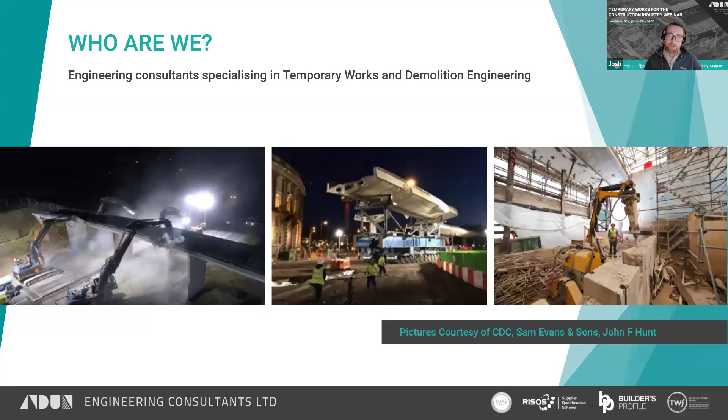So today's topic is temporary works design briefs.

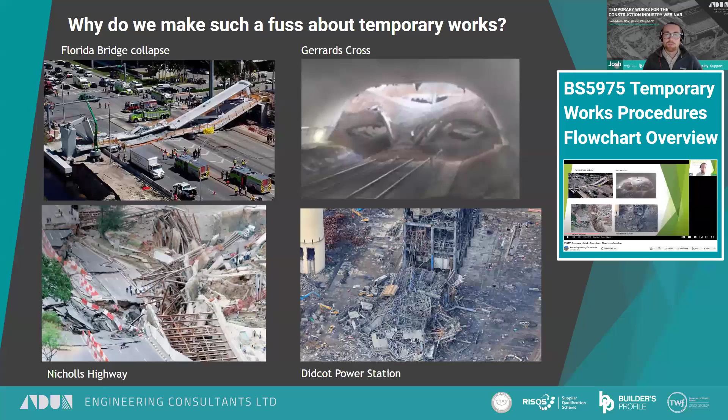We have got a webinar that covers the temporary works flowchart, and that flowchart review, including some of those case studies there, and that covers the procedural control of temporary works more generally, as opposed to today's session, which is going to be a more focused review of the design briefs. So make sure you check that one out, which is on our YouTube channel.

So we've got these disasters. Yes, temporary works can be fraught with risk if it isn't planned properly. But how long has this been happening for? Well, it's quite a while. Really, it just goes hand in hand with construction. The required control is becoming more and more important now, though, as we start to build things which are much more complex in more complex environments.

This case is the earliest temporary works failure that was referenced as such, and in fact it was discussed in Parliament as well.

Fast forward a little bit, it's 1972, I think, Loddon Viaduct, it's a bridge just outside Reading. It's the construction of one highway in each direction, and during the construction of one of the bridges, the falsework failed, leading to large-scale collapse.

Only 3 were killed in this incident, which is quite impressive - or impressive's not really the right word, but it's astounding, I think, probably more appropriate, because there were operatives on top of the structure as it failed. And that's more by luck that we had as few fatalities as you'd expect, because it happened on a lunch break and they were staggering the breaks as well, so there was a reduced number of people on site.

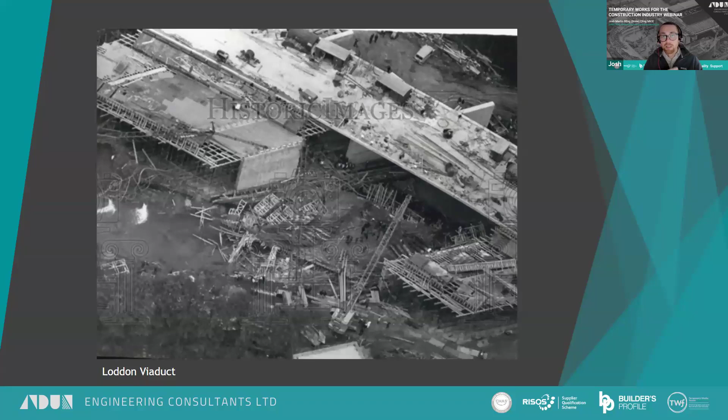There were also references to some of the guys on the span feeling a slump in the deck as the thing was about to go - they were able to jump across to the other side of the bridge that had just been constructed as well, which is also gobsmacking. Yeah, large-scale collapse, 3 fatalities.

And so what we found is that during the 50s, 60s, and 70s, the post-Second World War infrastructure boom, there was some large-scale infrastructure being built and large-scale collapses that were the results of poorly planned temporary works. And that was a fact.

These failures led to the industry leaders sitting up and thinking, we need to do something about this because it's certainly something we can avoid for the future going forward. It led to Sir Stephen Bragg and the Bragg report, a committee that put together an investigation and report to review the failings the construction industry had, and identify recommendations on how we can improve.

Most of these recommendations, which came out in 1975, were incorporated into the British Standard of Temporary Works, BS 5975, as we have it today. Some of the key ones I've listed here.

We've got a number of them associated with lateral stability, making sure that if we're supporting something, it is suitable for some form of lateral load. It doesn't just all fall down like a pack of cards when we accidentally hit it with an excavator bucket, for example. So we've got horizontal loads looking at lateral stability, lacing and bracing of props to provide that lateral stability overall on the propping system.

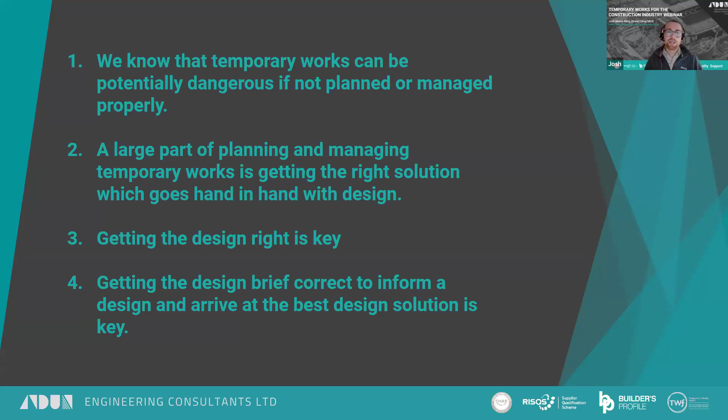The design brief sits in that procedural control before the design is started, and is usually written by the temporary works coordinator once a construction strategy has been agreed, because it's only at that point when you'll know how you're going to build something, and therefore what kind of temporary work solutions will be required.

We've got an online temporary works flowchart, which takes you through the whole process of temporary works from the project's inception through to completion, and Christian has put that link in the chat. It will take you to a login details page, and it's totally free. You put in your email address, make a little account, and then you can click and choose the most appropriate option, whether you're a principal contractor, a managing contractor, or a subby, and then it'll take you to an interactive flowchart which references BS 5975 directly.

We've also put little interactive buttons which tether the particular clauses to the relevant stages of the process. So you can see here that the design briefs can be written once the temporary works register has been filled in, or at least started. And then the design briefs can come before the design team are selected as well, so they can all be sat there ready before your design team is selected, and issued to prospective engineers for quotes, then back and ready in draft form until all the information is available to enable the design to start.

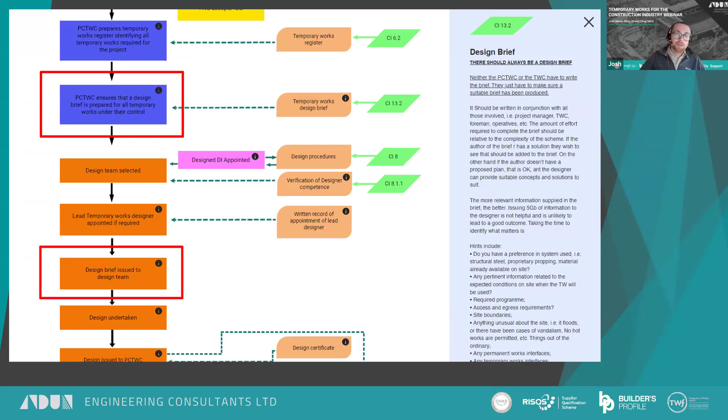So the design brief should give the designer all the relevant information to complete the design. It may be the obvious stuff, what needs to be designed, the category of check required, etc. I've put in a couple of extracts from BS 5975 here. It needs to provide the intent and the information for the design to be carried out, first and foremost. It doesn't necessarily need to be a formal document for every single task, but it should have the information to allow the design to be completed and checked.

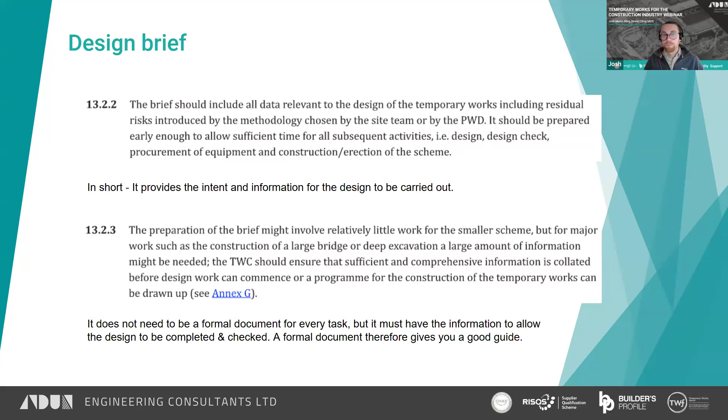It is good, in my opinion, to have a written trail of what was asked for when, and it can be used as a bit of a tool to bash your design engineer on the head if you've asked for something formally and then you get the design through for review and think, oh, they haven't included this or this part of the design. It's very difficult to go back when it's just verbal. If you've got a written design brief, then it's very simple to go back with that written proof. Some food for thought there.

So a few sections that I'm going to cover next will be the kind of appropriate things to include in a design brief, and I'm going to use our ADUN design brief template, which is downloadable from our website. Chris has put the link to that in the chat, but if you go to our website, adun.co.uk, click on resources, it's under the resources there.

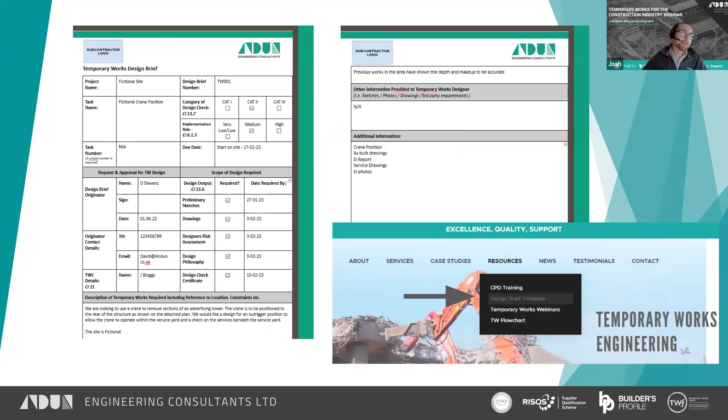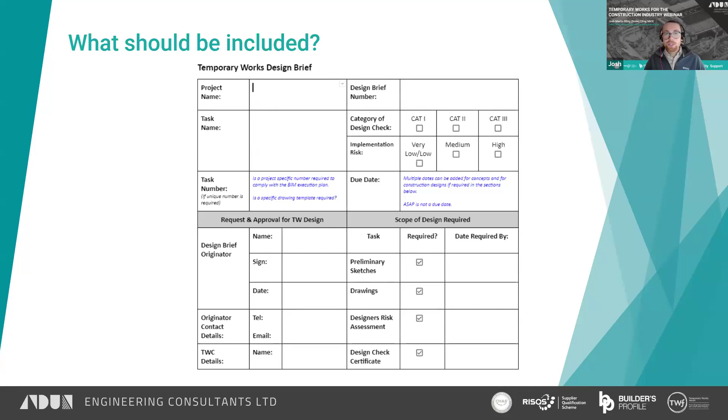Essentially a scale of how independent you'd like the person checking a design to be. If it's a low risk design, then it's not necessary to have a drawn out checking process, so a basic check from someone within the design team is more than acceptable. However, if it's high risk, a bespoke scheme with innovative design including departures from industry accepted standards, then it will more than likely require a Cat 3 check, which is another organization carrying out their own independent check without looking at the calculations that the designer put together to inform the design.

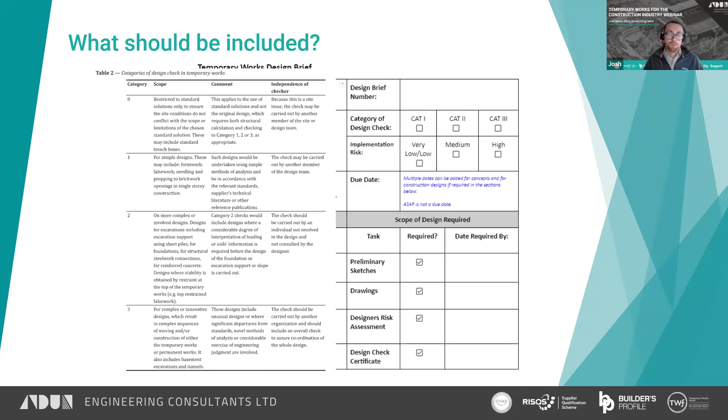Implementation risk as well relates to the execution risk, i.e. how it's installed and removed, the competency of the contractor building it, and the workmanship, etc. So it's the execution risk of the temporary works as well as the consequence of failure. And the consequence of failure is what happens if it goes wrong. If you stand back and think, well, if this thing was to fail, then what would happen?

Would it be a domino effect into a large scale collapse, or is it just something that's going to fall over in the middle of a green field? Well, the Heras fence has fallen over. We'll just pick it back up again and move on with our lives.

This implementation risk class should be put into the design brief, and it's classed by the temporary works coordinator with input from the construction and design team as well, so all those parties can be brought together to understand what risk there is.

And therefore what risk class it sits in. The difference here is that it's not necessarily governed by the design. So with the implementation risk class, a hoarding, for example, or an excavation support scheme in a field, carries low consequence of failure, compared to if that same design failed in a busy shopping centre or adjacent to a railway.

If it fails in that environment, the likelihood of fatality increases, or large economic loss increases. So the implementation risk class should outline the company procedures to follow. It may be that there's a peer review or further permits and hold points to include. But as a broad brush comment, it tells you how much planning time, resource, and attention to pay to a particular scheme. If it's higher risk, you're going to be spending more time reviewing it, because it warrants it due to the consequence of failure or the workmanship side.

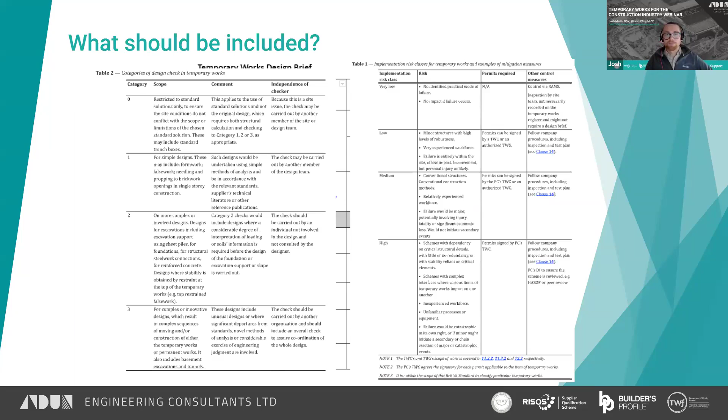So what else should be included? Here we've got the description of the temporary works required. Try to think of this as a problem rather than trying to go straight to the solution. Tell the engineer the full story of what's required.

Such as, I want to put a piece of plant on the slab during a demolition project, rather than let's design some back propping for this piece of plant on the structure. Or another example, I need to install this reinforced concrete wall, rather than can you redesign some sheet piles, because I'm going to put them in front of an area where I'm going to build this wall.

This means the design engineer you're employing can look at safe batter angles for that instance, or alternative solutions which may be more economical, which you've perhaps not thought of. Are there any historical archive drawings of the structure, or does site investigation, often called SI, need to be carried out? Do we need to specify locations for where the SI needs to be? This can all be included in the wish list. After all, you ask for what you want, or you get what you're given.

Here we've got a box on preferred methods, systems, and types of equipment. So here you can describe what we would like the engineer to design, preferred methods, etc. Or if you've got any preferred kit, or you've already got a supplier on site who's already on the books, so you'd like to use their kit. Is it likely that it's going to be in there for a couple of years? If so, a fabricated steel solution may be more appropriate as opposed to hired proprietary kit.

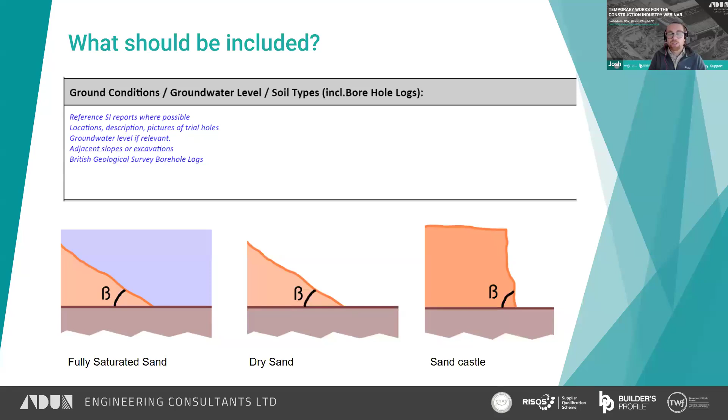Something else that should be included: design limitations, whether they're site imposed or contract imposed. The main one here really is third party interfaces - who is it on our boundary that we're going to affect during the proposed works, and what kind of hoops do we need to jump through to make sure everybody's a happy bunny? Are the works going to interact with Network Rail? Do we need to put together a BAPA, a basic asset protection agreement with Network Rail? Will we need a CEM role or a CRE role and complete Form Cs, etc.? We need to know that up front so we can allow for it as part of the design.

Are we going to be altering a public highway? In which case, do we need to complete a document known as an AIP, or Approval in Principle? And do we need to assist in getting those approvals as well?

There may well be specific limitations that need to be considered which are bespoke to that particular job. Each project is its own specific site, so there may be some quirky things apart from that which we need to review as part of the design, and that should find its way into the design brief. There may also be particular loading conditions or considerations we need to think about.

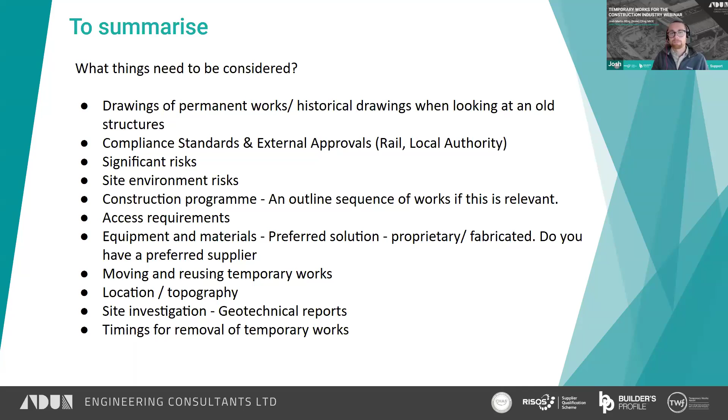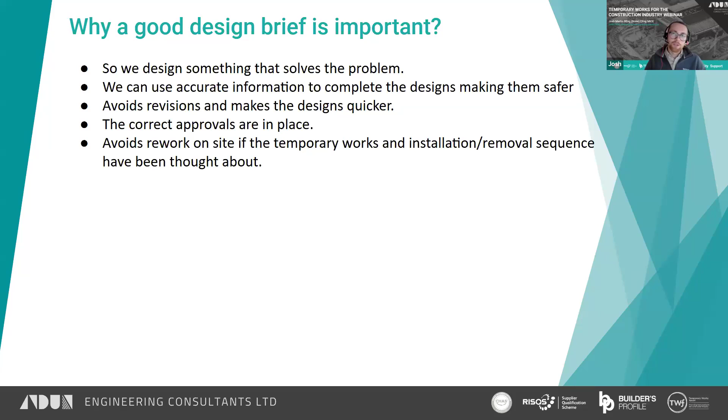The correct approvals are therefore going to be in place, so it enables mobilization on site a lot quicker. And it avoids rework on site as well if the temporary works and installation removal sequence have been thought about in the first instance. And I'm going to bring up my old soapbox and stand on top of it.

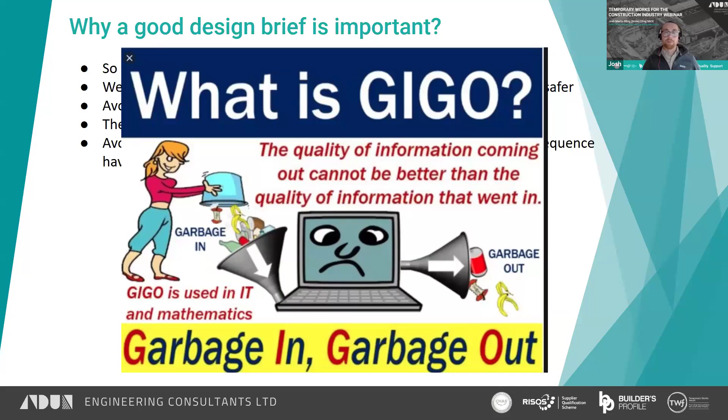Talk about GIGO, because it's garbage in and garbage out. If what we're putting into the design brief is a load of rubbish, then the design that's going to come out at the back end is also going to be a load of rubbish. The more accurate information that we have at the beginning, and the better the design brief we have to design, then the design engineer who's carrying out the work is going to know exactly what to do and exactly what to allow for, and is going to give you something that is going to work a dream on site. So that's GIGO, garbage in, garbage out. That's worth remembering and keeping in mind when we're writing these design briefs.

On to our first case study then. So this is more of a generic case study, I'd say, looking at a mobile crane position that we have on a site, something quite regular that comes through.

So here we've got a straight from our template, the Andun design brief template. And you can see that we've got some items in here, project title and name and task number, etc. So these will just be in accordance with whatever you've got in your temporary works register. On the right hand side, you can see we've got the category design check, which is just a tick box. Here we've gone with Cat 2.

Implementation risk as well. We've got very low or low on the left-hand side, medium, which is ticked in this case, and then high. Task numbers, due date, start on site.

On these, from my recommendation, anywhere where you're putting a date, so we've got the due date there and date of preliminary sketches, designs, etc. It's very tempting to put as soon as possible, ASAP. But you've got to remember, ASAP means a lot of different things to a lot of different people. If you put a particular date in there, even if it is that day or the next day, then when that design brief floats through, hopefully you've given them a call beforehand, but once that design brief comes through, and somebody sees that date, which is tomorrow, you're more than likely going to get a phone call thinking, whoa, hey, I see that this is due for tomorrow. We're really going to struggle with that. Let's talk what we can do for you.

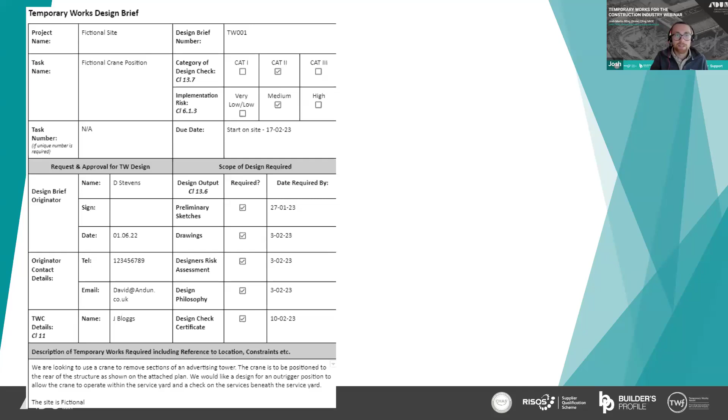So here we've said we're looking to use a crane to remove sections of the advertising tower. The crane is to be positioned to the rear of the structure as shown on the attached plan. And we'd like a design for an outrigger position to allow for the crane to operate within the service yard and check the services beneath the service yard too. In this case, the site is fictional. So it's just a general overview of the temporary works that we've got on there.

The next page, we've got preferred methods, systems, and types of equipment. So the preferred solution is we've got some timber mats which we can use. So we'd like you to spec them, please.

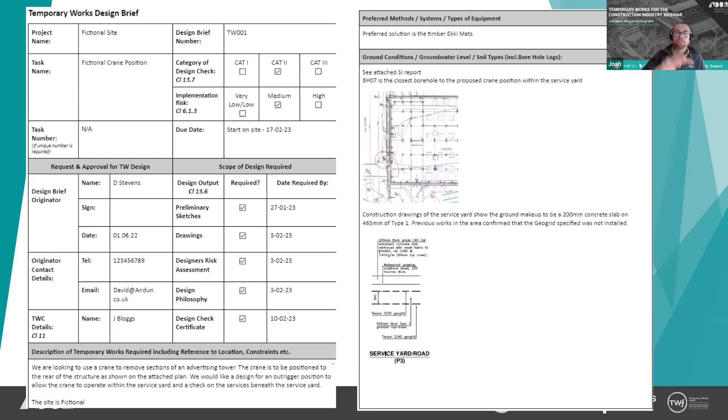Ground conditions and groundwater level, soil types. So you can see there that what Dave's put into this is we've got an attached site investigation report. Borehole 7 is the closest borehole, and we've highlighted that on this drawing. Construction drawings, the service yard show that the ground makeup is this, that's put in there as well. So it's a succinct review of these. This is the information that we've got, and these are where to find them, essentially.

Design limitations, site imposed. So the crane is not adjacent to any network rail assets, and works are to be undertaken as a contract lift. We've got the loading requirements - that's a screenshot from the crane supplier who has identified the outrigger load, and Dave has put maximum outrigger load at 140 odd tons, as shown on the attached crane plan drawing. He's going to be attaching that as well. This design brief is going to go hand in hand with a file of supporting information, of which that crane plan is one. Access limitations - just not applicable in this case.

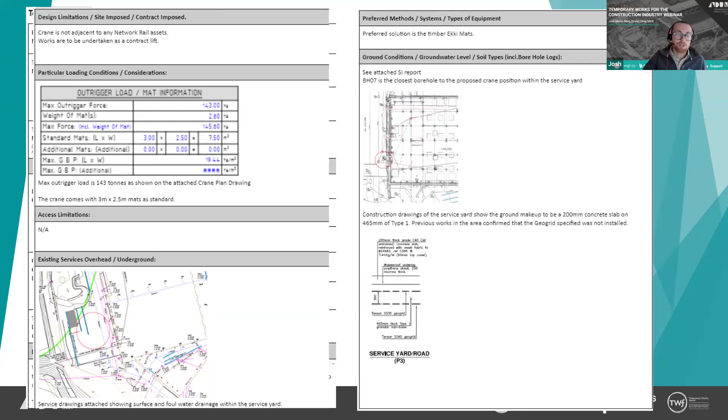And then we've got existing services. So he's put a plan there of the services locations, because that's important to review as part of this design, as we need to be carrying out a service capacity check. Previous works in the area have shown the depth and makeup to be accurate, so he's put a nice picture in there of what the ground profile looks like.

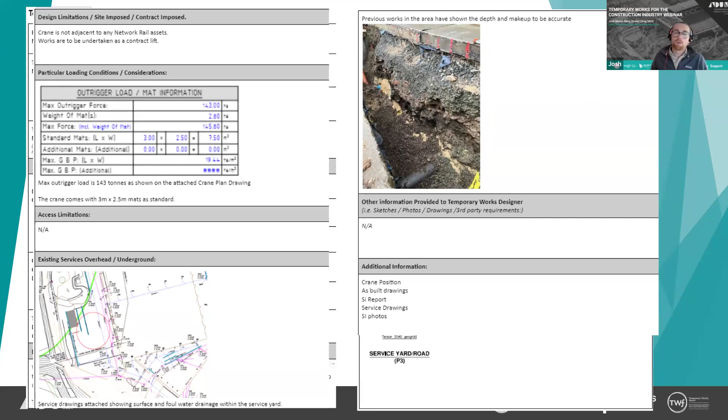Other information - not applicable. Additional information - we've got crane position, as-built information, site investigation report, service drawings, photos, etc. These are going to be brought in as well once this is packaged up and sent through to the design engineer. And that is all you need.

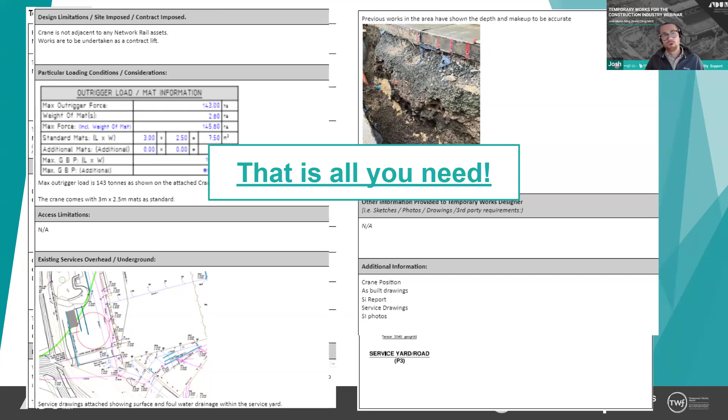That's pretty detailed - that's a really good example, but it doesn't need to be that detailed. It just needs to have the succinct information that you're trying to communicate to the design engineer. But the more detailed it is, the better the output of the design solution is going to be. And also, if you're getting a lump sum quote from a design engineer, the more detailed it is, the less unknown risk is going to come back in the price of the quote. If there's a lot of woolly statements like 'well, there might be services, so you might need to check that,' then the quote's going to come back with either an exclusion to check services, which you might need, or an allowance to check services, which you might not need.

On to the next case study then. This is the Old Granada Studios in Manchester for Bowmer Kirkland. I'm going to take us through the project, and a particular part where we put together a design brief. So it's Old Granada Studios - you can see that's the structure there. There was a structure there initially, it was demolished, and then a new basement redevelopment scheme, which you can see in this photo on the right-hand side. That is basement pile caps constructed, the basement floor in, and then the first floor level formwork you can see in the background there.

So we're bringing up - not first floor, ground floor - and working across to the elevation where the photo is taken. You can see we've got props to the perimeter wall to support that wall and prevent the road from coming into the site. On the left-hand side of that photo we've got an adjacent building, and on the far end another adjacent building as well. You can see that in the schematic.

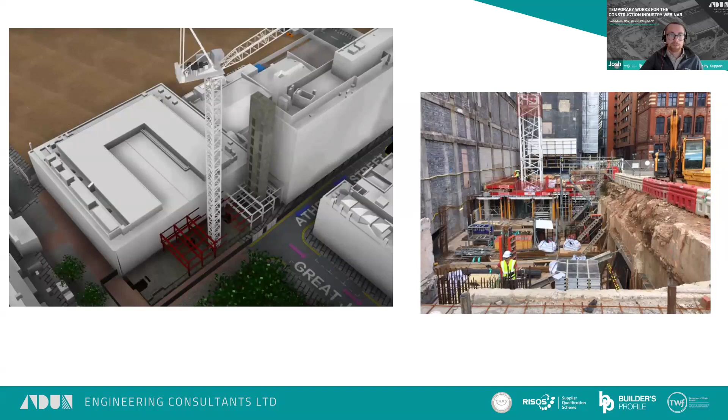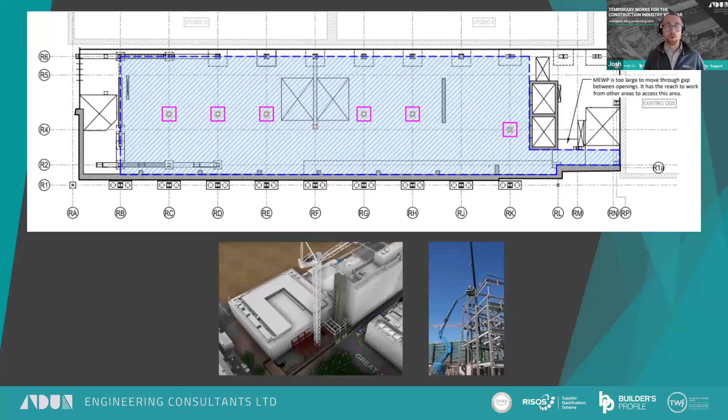The proposal - we've got a tower crane, a core coming up, and some steelwork there as well. So the design brief of what we were trying to do: we had this - the ground floor hadn't been constructed yet, and we had to accommodate quite a large MEWP to operate on this ground floor to assist in the steelwork construction, which you can see in the photo on the right-hand side at the bottom. So we had a large MEWP operating on the ground floor of a structure that had design loadings for just pedestrian access, and we wanted to see what MEWP size, or if the MEWP size our subby could use, would work on the structure.

So let's have a look at our template here. In this case we've got the project name, the task name, etc. The design check category in this case was Cat 1 or Cat 2, because we ticked those thinking, well, we're not sure whether it's going to be one or the other, and then that can be refined as the design process goes through.

Sometimes you might find that it's actually quite simple, and so it doesn't really warrant something like a Cat 2 check. In other cases, you think, well, yeah, that should be quite simple, and then as you start working through the designs, wow, this thing is growing arms and legs and turning into the right beastie, so I think it warrants a Cat 2.

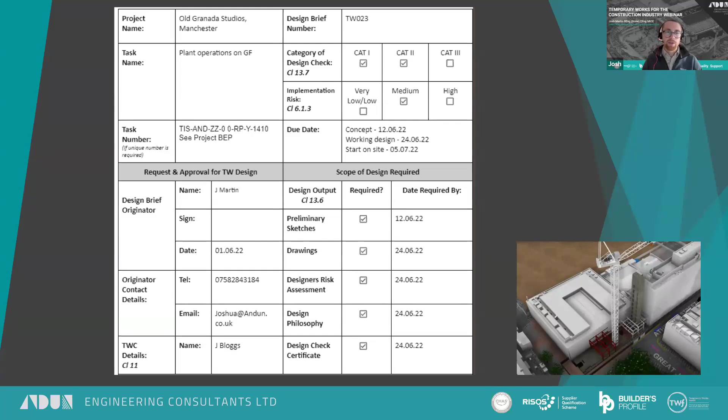So it's really on receipt of that initial design is when that checking requirement is confirmed. Implementation risk is medium on this particular one. Due dates, we put a few there. So we'd like a concept, and then we'd like a working design, and then start on site, some dates there, and then they are filled in through also the scope of the design required.

Description of temporary works required, including references. So we've got a 15-ton MEWP required to operate on the ground floor slab to facilitate the installation of steel from levels 1 to 6. Structure details attached, the ground floor has not been constructed yet. The MEWP will need to operate over the whole slab over the course of several weeks.

So we've got some timeline there. We've got what the current start of the site is there. We could add some photos in as well, just to kind of show this is the description of where we are and what we need.

Preferred methods. Structural engineers have stated that the proposed MEWP point load from the wheel is too great. Therefore, simple backpropping to the ground bearing basement with Acrow props or similar would be suitable. We have easy access to Acrow props on site, so they've got loads of them, so they'd like to use those if need be.

Ground conditions, we've got a basement slab as per the drawings attached, and the pile design and site investigation report is also attached. You can just put that to the back and send that through as the package.

Design limitations, the MEWP will need to access all areas of the ground floor slab, so it needs to go everywhere. That's very important, because if it only needed to go in a particular location, then that really reduces the scope of the temporary works design.

If you just sent it through, we'd like the MEWP to work on the ground floor, and then there may well be a very complicated part of the structure which really doesn't need to be looked at from the temporary works engineer, because the MEWP's not going to go there. But if that's not specified in the brief, then that's going to be included and end up taking more time and increasing cost.

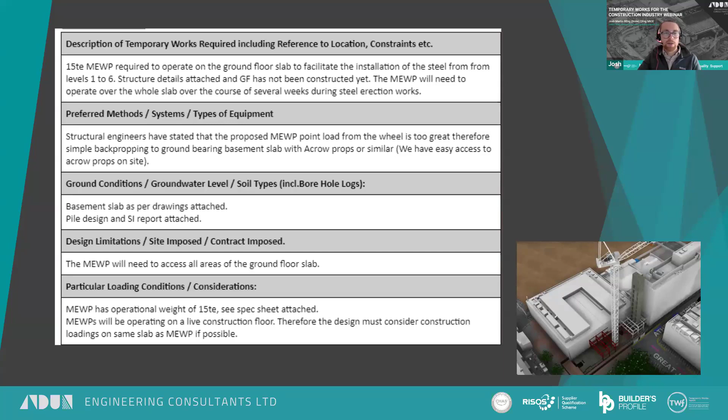So we've got design limitations, particular loading conditions as well. So the MEWP has operational weight of 15 tons, see spec sheet attached. It's going to be operating on a live construction floor. Therefore, the design must consider construction loadings on the same slab as the MEWP if possible.

Access limitations. The ground floor slab has no access limitations. The basement is accessed via hoist and new stair core. There are no services in the area.

And other information, we've got see attached sketch from the steel erector. So that may well be the subby who said, yeah, I'm going to be sitting my MEWP here. There's also going to be another MEWP next to it, or a smaller scissor lift that can then inform the loadings assessment on the design. And there's no third-party approvals that are necessary. Additional information.

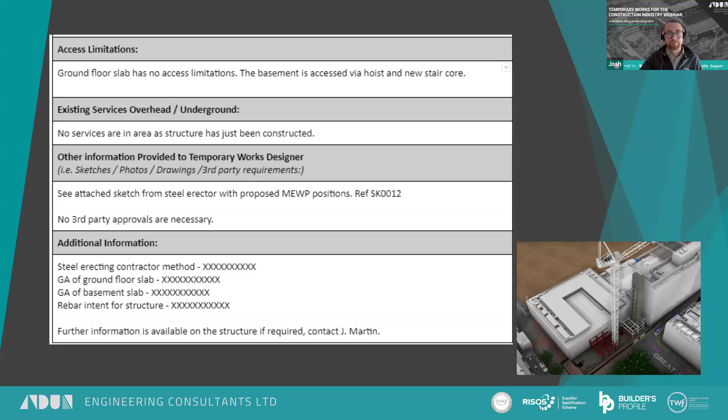See these drawings. Okay, so that's a fairly well-written brief, I'd say. So the assessment of the temporary loadings from that design on the structure resulting from the construction plants, such as the MEWPs and the cherry pickers, the pallet trucks, etc., that proved quite interesting, actually.

So the structure wasn't designed for these heavy loads. It was just designed for an area loading. Therefore, in this scenario, we asked for the permanent works designer to look at the backpropping.

So the first instance, it was, hello, Mr. Permanent Works Engineer, who's designed this lovely slab. Will the forces work on that slab? Well, no, the point loads are too high for that, I'm afraid. So you'll have to seek assistance from Temporary Works Engineer.

Okay, so let's look at, if that fails, then we can put some backpropping in, surely. But hold on a second. Surely there's a better solution to some backpropping, potentially. So the key to this is that the contractor had planned ahead of time, and so that the slab hadn't been constructed yet.

So in this real life situation, we reviewed the loadings from the various plant and checked the new slab design for bending, shear and deflection without any backpropping whatsoever, just to see how far it failed or where it failed. If it's in a particular place, then we could just put props there, for instance. But we checked the punching shear in the column heads and the column capacity, as well as all the loading in the piles. So we did a full-on review of that structure from the plant loadings we're putting on there. And we concluded that backpropping could be omitted if we introduced some additional reinforcement.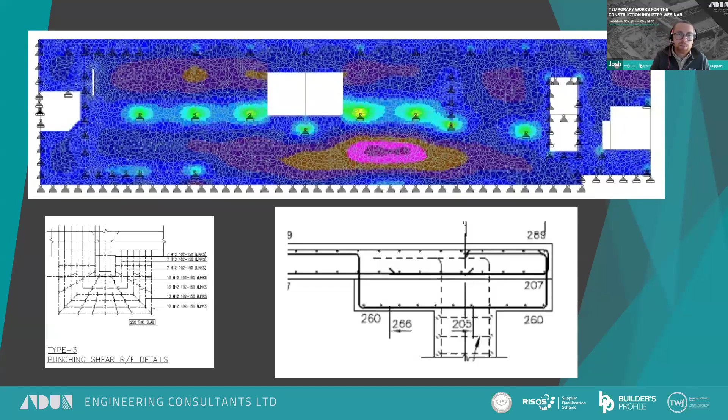So if we strengthen that slab slightly, that was in the form of some A393 mesh in certain areas. The failure areas on this model were the purple zone, and then the greeny kind of zones above the column heads. That's where we needed to strengthen the structure.

So following this conclusion, we produced this drawing, which demonstrated that proposal. This solution removed the requirement for any backpropping and its associated costs of installation, hire, and removal. And in addition to that, which was quite key really for the contractor, was that it enabled the basement finishing works to proceed because there were no props in the way, which was on their critical path otherwise, which is a fantastic result.

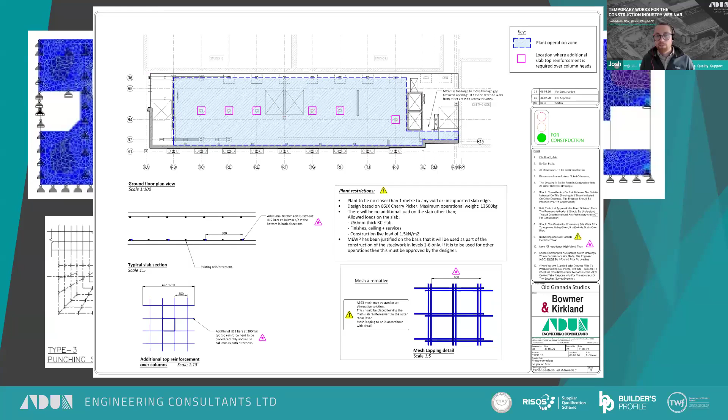So the solution was very effective in speeding up the program, reducing the costs, whilst also maintaining the required margin of safety. But it did require some forward planning, which is really important. If you think ahead, you get ahead of the game.

But this links back to something that makes a good design brief, is an idea of what is expected without leading the witness or leading the designer. It's not saying, well, we'd like this, please. It's producing the problem, setting out the problem that needs to be solved on site, so you can use your design engineer's experience to find the best solution for you.

So hopefully those two case studies have reinforced what can be achieved with writing a good design brief. Planning early definitely pays dividends. So it's just a kind of a wrap-up summary before we go to some questions.

Providing succinct, accurate information in good time, not saying well this is the information, it's all on the project database, here's the attached link, all the drawings are there. It's finding that information and providing that succinct and accurate information, highlighting risks to increase safety really. Any materials available or preferred materials is to better inform the designer on what tools they have easily available on site to keep costs down and keep program sharp.

An idea of what is expected without leading the designer, as I've discussed. The timescale and making them realistic, not put in ASAP, as this means different things to different people. And then design life, like I mentioned earlier. So you'd be surprised at what an engineer can do with the knowledge that something's going to be used once as opposed to repeatedly over the course of 6, 12, 24 months. Knowing that design life leads to lean and quite efficient design.

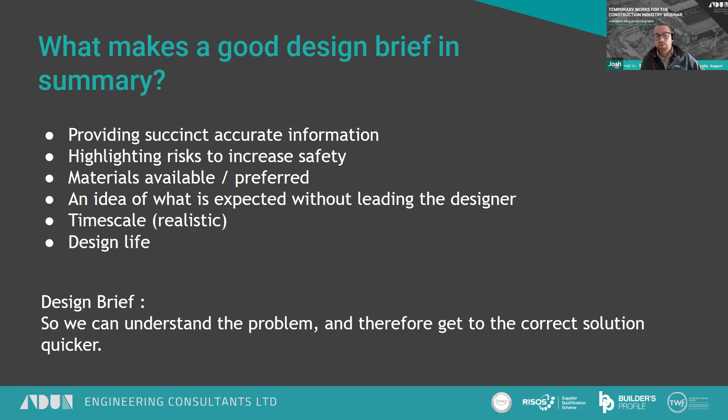So the Temporary Works forum produce a lot of good stuff. There's guidance on the constructability of Temporary Works, as well as a lot of content on their website, worth a look. BS 5975 itself, which is the go-to code for Temporary Works design and procedural control of Temporary Works. There's a Safe by Design focus group, early focus on, which is spearheaded by Steve Williams and his team at Network Rail. There's a very good document called Guidance Note on the Early Focus of Constructability and Temporary Works. So that's worth a read as well.

And then finally, there's the ADUN webinars. How could I forget? 90 plus videos on there with all sorts of content ranging from complex demolition case studies to net zero challenges to crash course in plate bearing tests on working platforms, just to name a few.